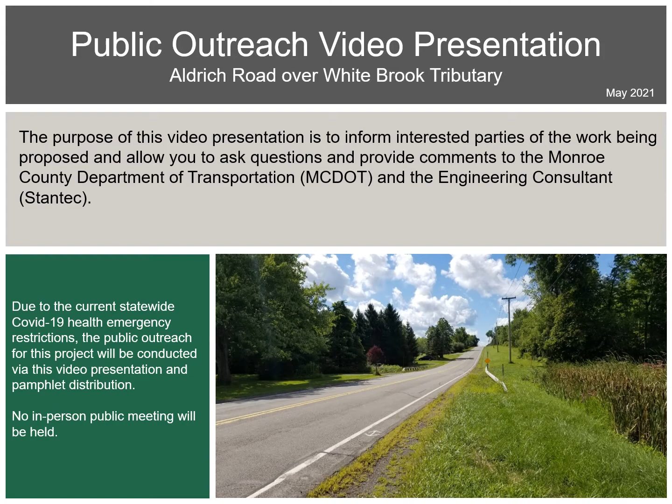Aldrich Road is located in the town of Perinton in the southeast corner of Monroe County and is oriented north-south, running between New York Route 31 and Ayrault Road. The subject culvert is located where Aldrich Road crosses over White Brook tributary, approximately equidistant between New York Route 31 and Ayrault Road.

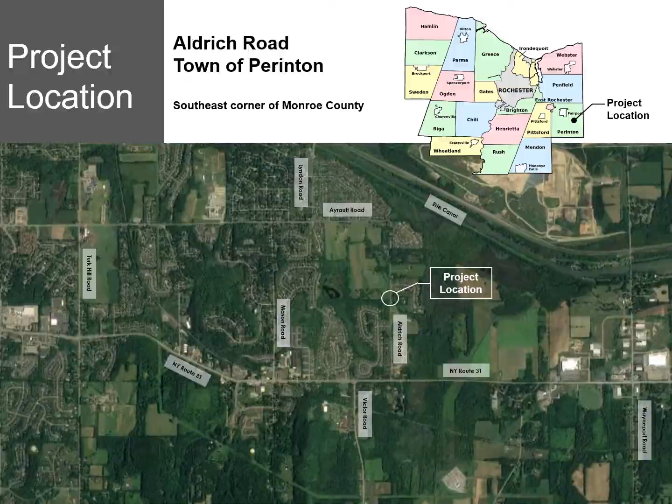The existing culvert structure was originally constructed in 1921 as a three-sided concrete cast-in-place culvert. In 1952, the culvert was extended on both ends to accommodate widening of Aldrich Road. The culvert is constructed on a 45-degree skew as measured from the roadway centerline. The existing culvert is built with an 8-foot span, measured perpendicular between sidewalls, and has a 4-foot rise from the bottom of the stream bed to the bottom of the top slab.

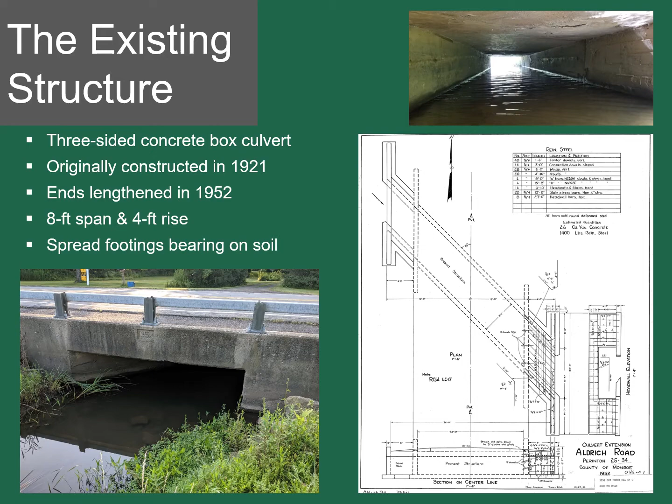Recent inspections by the Monroe County Department of Transportation and Stantec identified that the culvert is in poor condition, predominantly due to the deterioration of the concrete structure. Large portions of the top slab and sidewalls are cracked and have areas of spalled concrete. The reinforcement in these areas is exposed to the elements, resulting in corrosion. Along some portions of the culvert footings, the stream has eroded the stream bed, causing minor undermining of the structure.

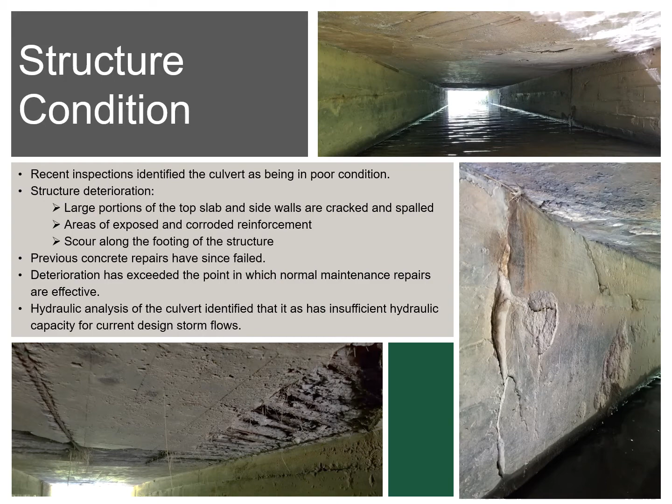Periodic repairs have been made to the culvert to extend its life, but many of the repairs have since failed. The culvert has reached the age and condition where normal repairs are no longer effective at extending the life of the culvert. Additionally, a hydraulic analysis of the culvert determined that it has insufficient hydraulic capacity for conveying the current design storm flows of White Brook tributary. As a result of the aforementioned structure conditions, Monroe County decided to progress a project to address these concerns.

The project has been initiated and is progressing through planning and preliminary design with the following 5 goals and objectives. Improve or eliminate structural deficiencies to meet current codes and standards. Improve or eliminate hydraulic deficiencies to meet current codes and standards. Improve or eliminate geometric deficiencies to meet current codes and standards. Provide pedestrian and bicycle facilities to meet current codes and standards, and meet the above 4 objectives by providing a maintenance-free and durable, long-lasting solution in a socially, economically, and environmentally sensitive manner.

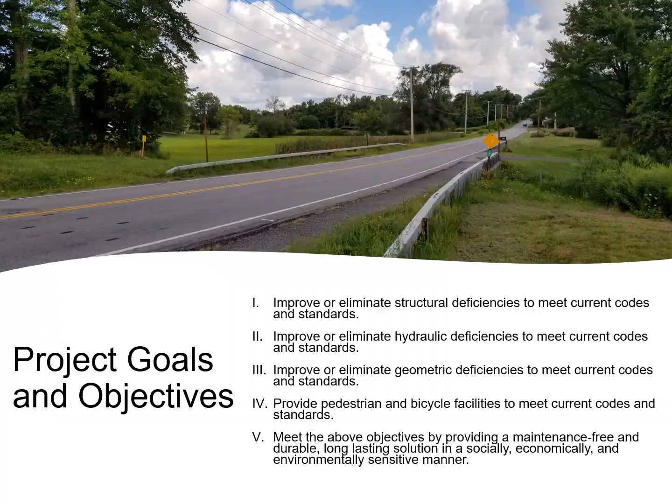To achieve the outlined project goals and objectives, a preferred alternative has been developed. The preferred alternative will completely replace the existing culvert with a new culvert structure. The new culvert will consist of a precast concrete box culvert, which will have a 14-foot span and 6-foot rise. The new larger culvert will provide an increased hydraulic capacity for the 50-year design storm, allowing for 2 feet of vertical clearance from the top of floodwater elevation to the elevation of the roadway shoulder as required by New York State DOT. The structure will also have precast concrete wing walls at each corner to retain the roadway embankments.

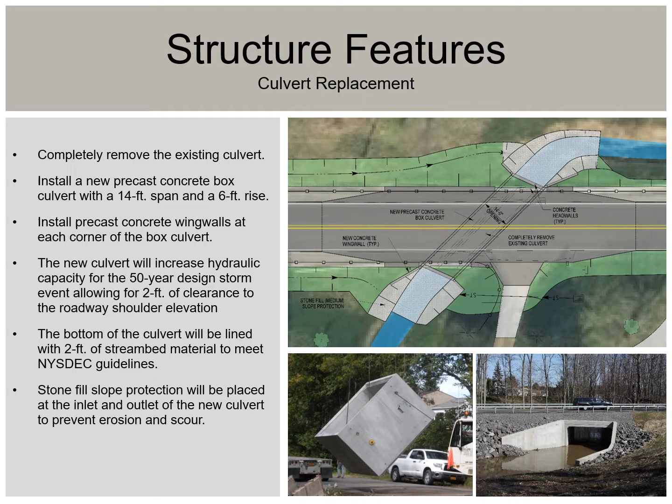Inside of the culvert, the bottom will be lined with 2 feet of stream bed material, meeting the guidelines specified by the New York State DEC. At the inlet and outlet of the structure, stone fill will be placed to prevent erosion and scour.

The preferred alternative will also include work to the roadway at the approaches to the culvert. The limits of roadway work extend approximately 200 feet south of the culvert and 175 feet north of the culvert, combining for a total length of 375 feet. Within the project limits, the roadway vertical profile will be slightly increased to ensure sufficient cover over the new culvert by reconstructing the road with 2 different cross sections.

The road will be fully reconstructed to include new subbase and a full asphalt section where the existing road will need to be excavated for removal of the existing culvert and for excavation of the new culvert. The fully reconstructed section of road will be 150 feet long and approximately centered where the culvert is located. It will consist of two 11-foot wide travel lanes and 6-foot wide shoulders.

The remaining portions of the road will be milled and resurfaced with 11-foot wide travel lanes and shoulder widths to match the existing adjoining sections of Aldrich Road. Additionally, the project will install new box beam guide rail where needed along the road, install improved drainage, and install new traffic signs or replace existing traffic signs to meet current standards.

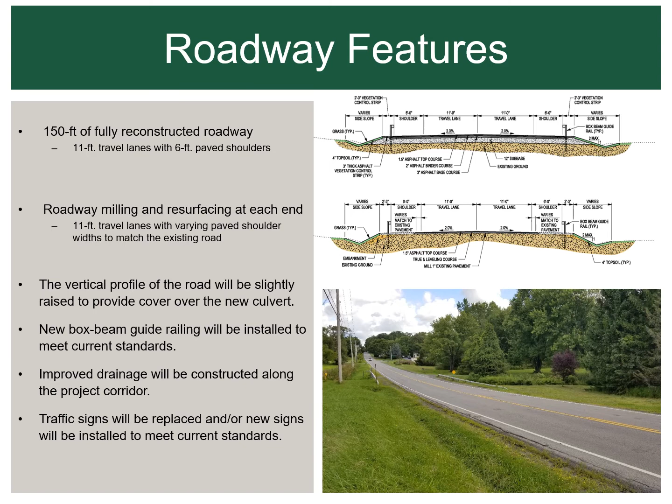Alongside Aldrich Road, there are several utilities on either wooden utility poles or buried underground. These utilities include water, natural gas, sanitary sewer, electric, cable TV, fiber optic, and telephone. Some of these utilities are expected to be impacted by the construction and require relocations.

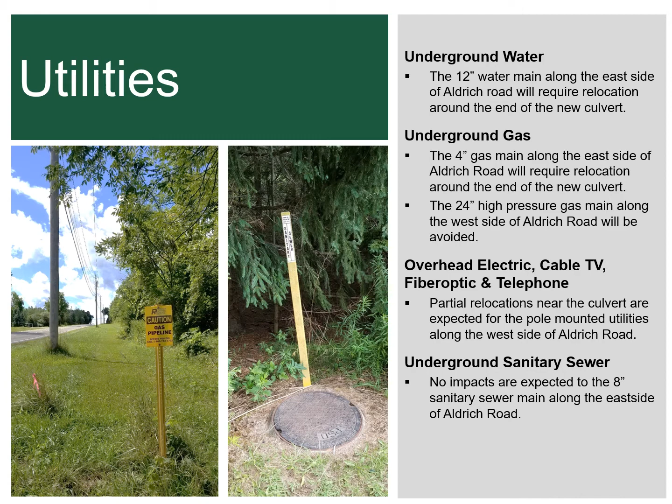The water main along the east side of Aldrich Road will require relocation around the end of the new culvert, as will the gas main along the east side of Aldrich Road. The high-pressure gas main along the west side of Aldrich Road will be avoided. Overhead utilities will require partial relocations along the west end of the new culvert, and no impacts are expected to the sanitary sewer along the east side.

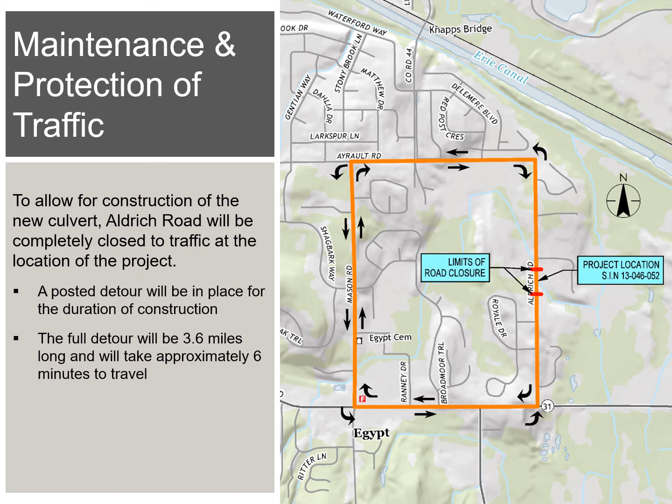To allow for efficient construction of this project, the maintenance and protection of traffic will involve fully closing Aldrich Road at the project site and posting a detour for the duration of construction. The detour will utilize New York State Route 31, Mason Road, and Ayrault Road as shown in the detour map. The full detour length from closure to closure is 3.6 miles and will take approximately 6 minutes to travel.

The proposed permanent easements are located at each end of the culvert to allow for construction of the new culvert, for relocation of utilities, and for the future maintenance of the culvert. The proposed temporary easements are located at each side of Aldrich Road, but further extended from the permanent easements to allow for construction access and for the installation and later removal of the temporary driveway. Monroe County will be in contact with the affected property owners to work through the easement process.

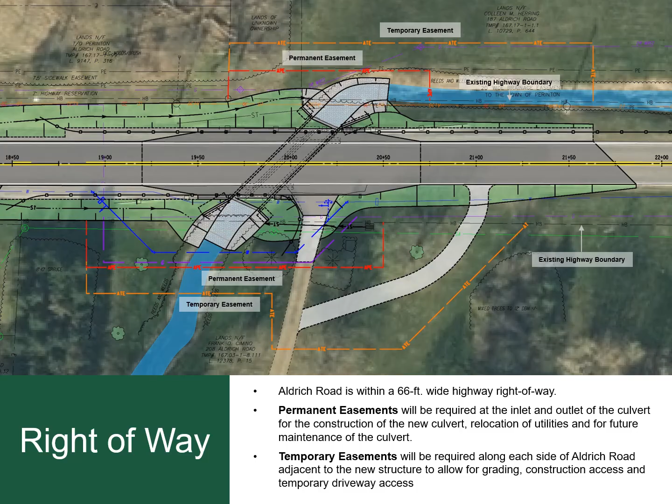The project is currently in the preliminary design phase and will soon be transitioning into final design following the approval of the design report and input from the public. Final design is expected to be complete in 2021, and the bidding for construction is scheduled to occur in the fall of 2022, with construction scheduled to begin in 2023. It is expected that construction will take approximately 4 months to complete.

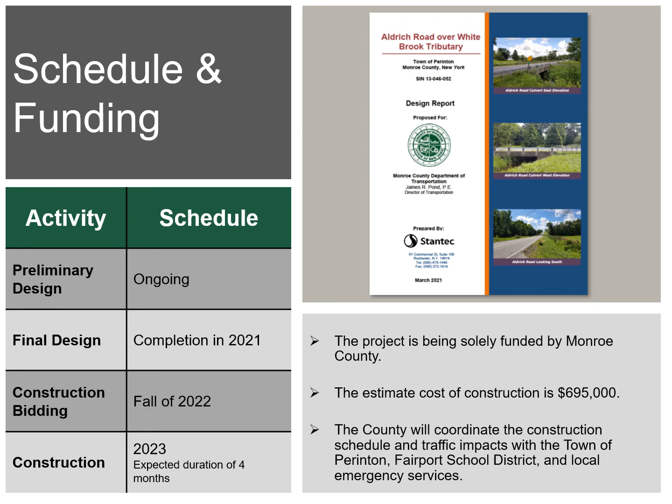The county will coordinate the construction schedule and traffic impacts with the Town of Perinton, Fairport School District, and local emergency services. The project is being locally funded solely by Monroe County, and the cost of the construction is estimated to be $695,000.